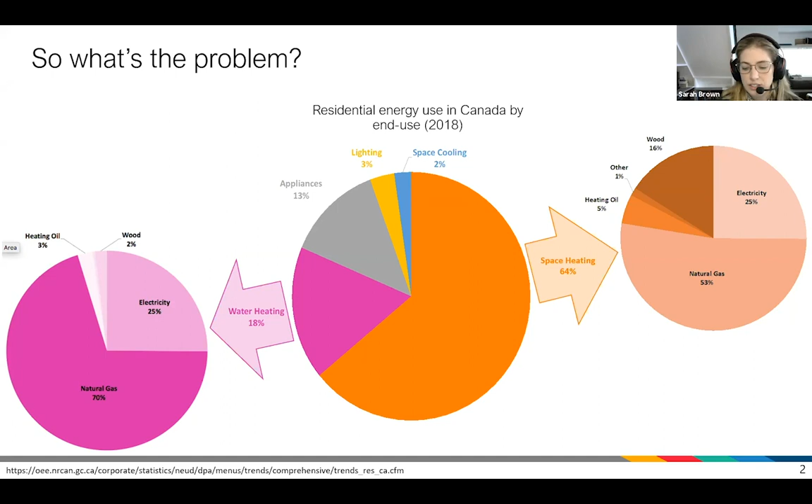Thankfully, in Canada, most of our electricity is actually generated from non-greenhouse gas emitting sources. So electricity is pretty clean in Canada. So when we're looking at appliances, lighting, space cooling, which are all electricity dominated end use categories, those ones are pretty good. So domestic hot water heating and space heating are just really good places for us to be targeting our efforts in reducing the residential sector's greenhouse gas emissions. If we also look a little bit further into this, 55% of the Canadian residential building stock is actually single detached homes.

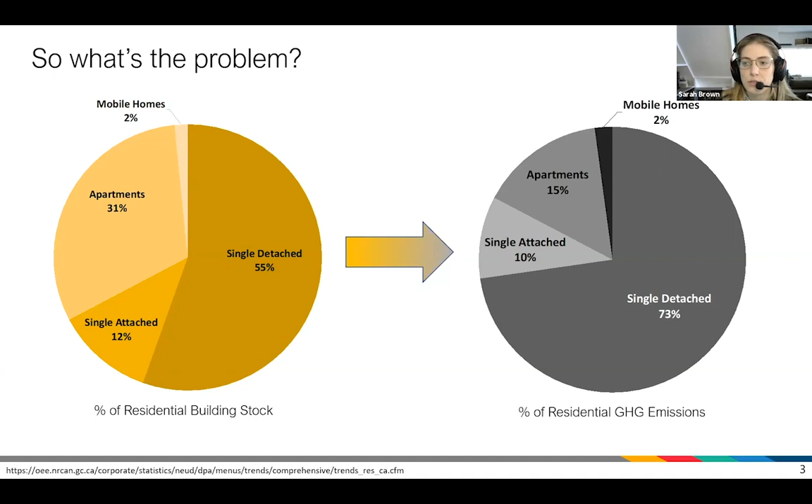So solar thermal collectors are really an interesting option for heating dominated climates since you can get higher efficiencies and directly collect the thermal energy and use it to supply heating demands in the house. So domestic hot water and space heating. So a really interesting option for Canada where we're heating dominated in our end uses. So Curtis Meister, who's one of my colleagues in the Sustainable Building Energy Systems Research Group, found in his research that solar thermal systems have the potential to meet over 90% of the space heating and domestic hot water heating demands in energy efficient single family detached homes in Canada. So really a lot of potential in this more unconventional collector option.

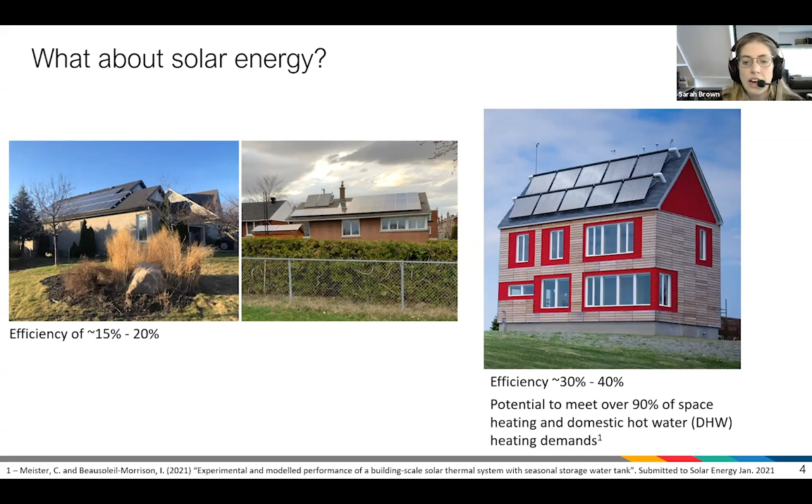So both technologies have their challenges, storage being a major one, cost is another often talked about challenge, but these are what we call active solar collection systems. And if they're designed properly, they can allow the same level of control for heating as conventional systems. But the title of this presentation specifically says that you will not need to put collectors on your roof to heat with solar energy. So, what's the deal with that? What's the solution? Passive solar energy is a third and I think often forgotten contender in solar energy.

I love this room. My plants love this room. My cats love it for sleeping. This is actually the room where I'll also often take my video calls since I get the best internet there. And I'll often close the door to keep my cats out because they'll harass me during my meetings. And by the end of an afternoon meeting, I'm often sweating because this room gets really hot.

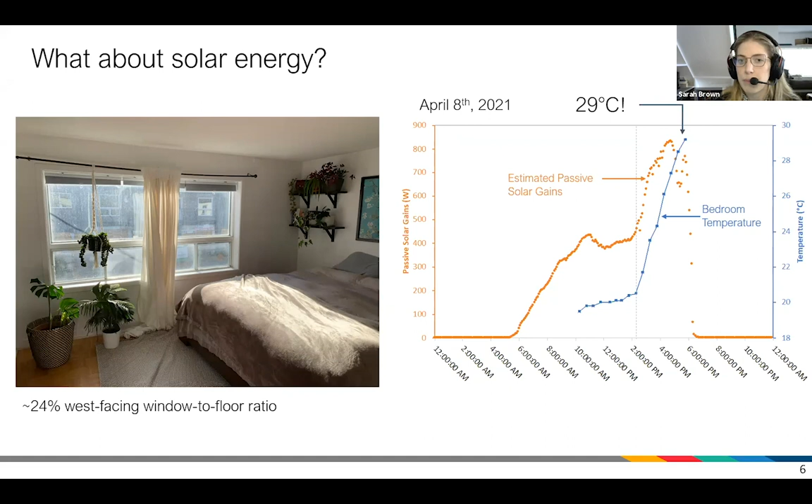I've put a vertical dotted line where the indoor air temperature really starts to spike in my room. Remember, this is a west-facing window, so I'll get most of my solar gains in the afternoon. Sun rises in the east, sets in the west. So you can see the spike in the indoor air temperature corresponds to the same time as the passive solar gains start to increase in magnitude, which makes sense. We're getting more energy into the space by passive solar gains, so the temperature really starts to peak up.

To put the heating potential of this passive solar into perspective, a high performing personal space heater, which some of you might have been using working from home this past winter, puts out between 375 to 750 watts. So the passive solar gains into my room on this day were comparable to turning on this little space heater at 10 o'clock in the morning, closing the door and leaving it on until 6 p.m. And we even got more than 750 watts between 3:30 and 6 o'clock, so even more than just the space heater.

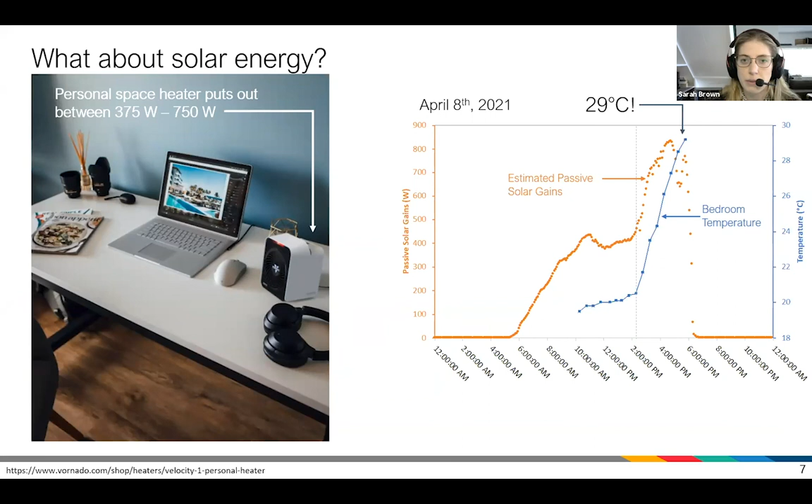All right, so pretty split answers here. And I was wondering if some of you would maybe not pick the obvious one, just assuming that it wouldn't be the obvious answer. So if you didn't pick the obvious answer, then you were correct. We actually get, on average, more than 3 times more passive solar on a sunny day in February than we do on a sunny day in July. So again, the total solar irradiance that we're getting is higher in the summer, but the passive solar energy that we get into our houses is higher in the winter.

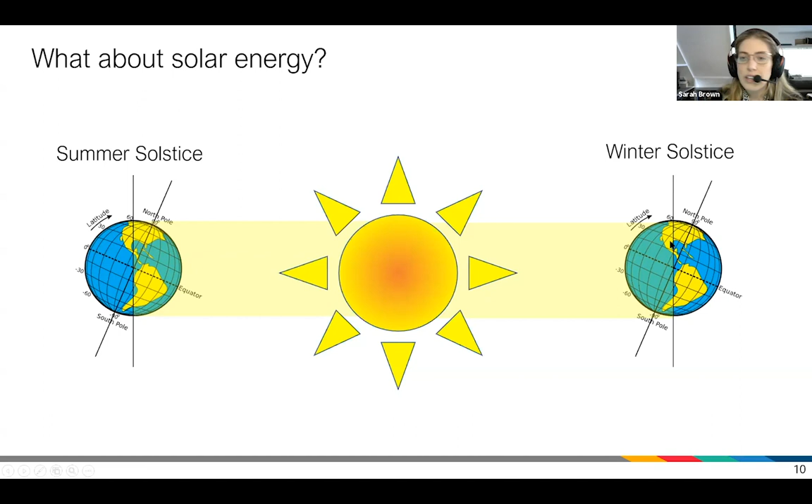But basically this correlation between our peak passive solar and our peak heating demands has a lot to do with the Earth being tilted at an angle of 23.5 degrees from its orbital plane, which I've shown in the schematic here. So we're not perfectly straight on with the sun. We're actually angled a little bit. And this tilt is why our days are longer in the summer in the northern hemisphere and shorter in the winter. So you can see on this left-hand globe, which I've represented as a summer solstice, the northern hemisphere is in the irradiated area longer. And in the winter time, we're in the irradiated area shorter, which means we have shorter days in the winter and longer days in the summer.

And Ottawa sits at a latitude of about 45 degrees north. So if you look at this schematic, you can get an appreciation for how the angle at which the sun irradiates our homes changes between the winter and the summer. The reason we get our maximum passive solar in the winter and minimum in the summer is due to our latitude in the northern hemisphere and the low solar altitude that we get here in the winter. So the low solar altitude in the winter, or the sun looking lower in the sky around noon in the winter versus the summer, results in the beam component of the solar irradiance being in line with our windows. Whereas in the summer, the sun is higher and the beam component hits our roofs a lot more.

So over the next year, I encourage you to keep an eye on the sun patch that's made by any south-facing windows in your home. You'll notice in the summer that the sun patch is pretty small and sits close to the window, but in the winter, it'll actually extend much further into your room. So you'll end up with a much bigger sun patch. And this is due to the lower solar angle that we have in the wintertime.

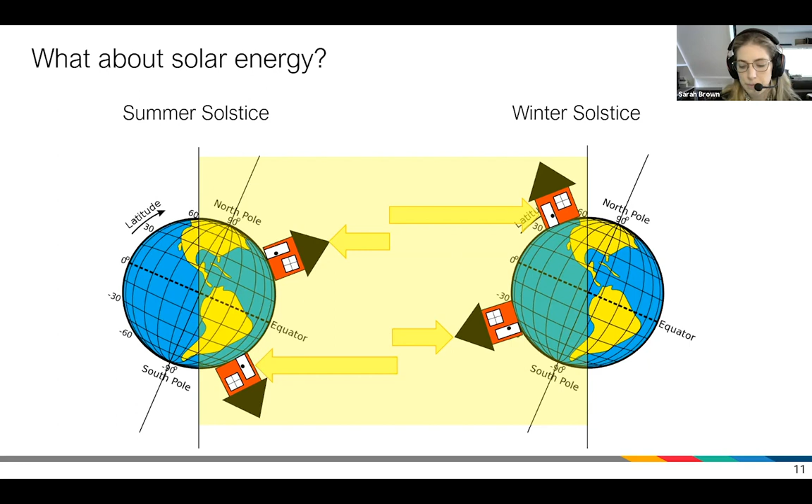All right, so now let's start to talk about my research in a little bit more detail. So we've now established that passive solar heating has potential and is a good heating option for Southern Canada. So let's talk about my research specifically. So I don't actually do my research in my bedroom, taking measurement data with a little thermometer.

That was just for fun.

I do all my research at the Urbandale Center for Home Energy Research, which we also call the Cheer House, and I'll be referring to it as that for the rest of the presentation. So the Cheer House is a research facility that you may have seen as you passed by Carleton's campus and thought very curiously, what is this little red solar house on a hill?

So let's just run quickly through some of Cheer's construction features. So it's built as an average size single family detached home that's typical of Canada. So about 6 by 12 meter footprint, full height unconditioned basement and 2 above ground conditioned floors. The house is of wood frame construction, built with more insulation than what's required by current building code, but built using common construction practices. So again, you could give our specs to any contractor and they should be able to build it.

The house is also very airtight. So we've purposely designed it to be airtight to minimize any energy losses through air infiltration. And the windows are triple pane argon filled windows with low emissivity coatings. So these windows are basically designed to allow as much passive solar heating as possible into the house while minimizing energy losses through the windows.

To maximize the potential for passive solar heating, Cheer has most of its windows on the south facade. So we have about 20 square meters of south-facing windows on the south side, and we have minimal window area on the east and west facade. So about 2.5 meters squared only on the east and west. And we have no windows on the north facade.

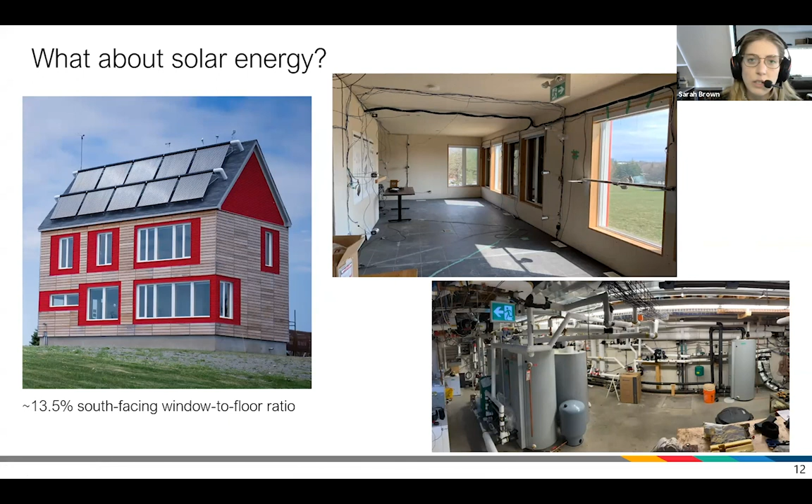In the basement, you can see basically a lot of piping and mechanical equipment, and a lot of this was actually installed by graduate students. There are many different thesis projects installed at the Cheer House, and we have a vast hydronic system that lets us switch between these projects really quickly.

So another really prominent feature of the Cheer House is the radiant floor. So we have 110 meters squared of low mass radiant floor installed on the 2 above ground stories of Cheer. So the 2 kind of living areas of Cheer. We have purposely designed these floors to be low mass and to have the pipes close to the surface so we can minimize the thermal lag between when we turn the floors on and when they start having an impact on the air temperature.

So for air-based HVAC systems, which I imagine most of you are familiar with if you have a home in Canada, when you need heat, your furnace basically turns on and starts delivering hot air to the house. And this has a pretty immediate impact on the air temperature of your house. In comparison, the thermal response of radiant floor heating and cooling systems is delayed from its on time.

So the heat from the water that's running through the pipes needs to then heat up the floor construction around it, which then allows you to heat up the surface of the floor. And then that surface will start convecting heat into the room and also radiate energy to the other surfaces to heat them up so that they can start convecting heat into the room as well. So again, there's a bit of a time delay between when you start sending hot water to the floors and when you actually start having an impact on the indoor air temperature.

So some radiant floors are designed to have high thermal mass, but we have purposely designed our radiant floor to be low thermal mass so that we can minimize the time lag between turning on the floors and having an impact on the air temperature.

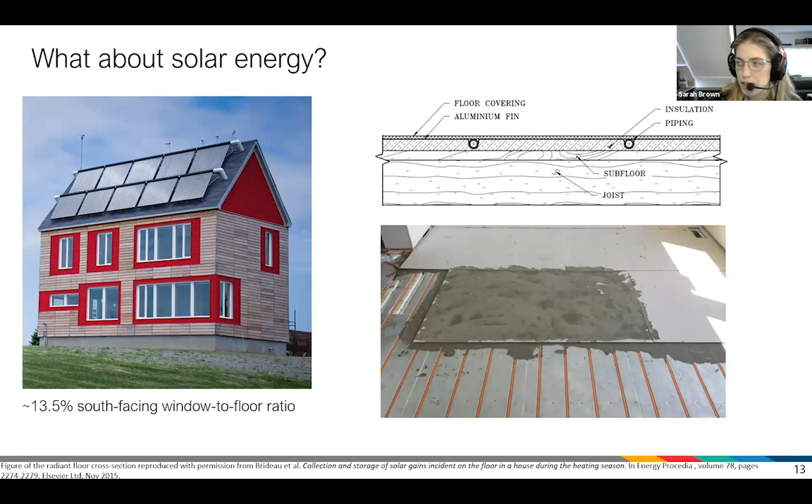So on this day we were mechanically heating the CHEER house at night, but no cooling was offered during the day. Something to notice here is that we're dealing with a lower window to floor area ratio. I forgot to mention this when I was presenting on my bedroom, but my bedroom had about a 24% west facing window to floor ratio. So now we're dealing with a 13.5% window to floor area ratio, but we're dealing with south facing windows now, which should receive more passive solar. We're also dealing with mainly south-facing windows and also a better constructed house than mine.

So my poll for you is if CHEER started at 22 degrees at about 8 o'clock in the morning, what is the maximum temperature that you think we reached on this January 28th day? So again, it's minus 20 out, so keep in mind that it's a lot colder. And yeah, we're just gonna give you a few seconds to get into that poll and submit your answers.

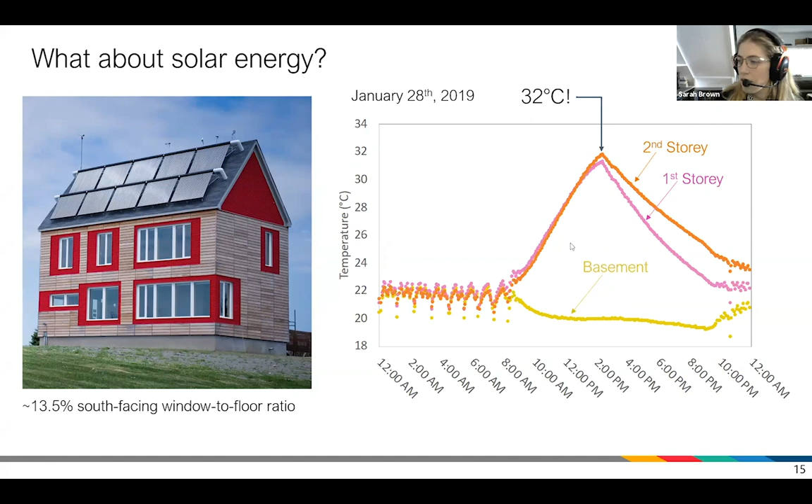All right, so here's a schematic of what we call the PISCES system. This is the system that we've designed to help us capture the passive solar energy without having overheating. PISCES essentially stands for the Passive Solar Collection Energy System. And I give credit to my professor who's always able to come up with really nice acronyms for very wordy names for systems. The system makes use of hot and cold thermal storages. In this case, we use water storage, the radiant floors that are installed at CHEER, and a water-to-water heat pump.

So the way it works is that when we need cooling in the house, we can send cold water to the radiant floors. This cold water removes excess energy from the conditioned spaces, thereby preventing overheating. So cold water leaves this cold storage tank, goes through the radiant floors, and it heats up as it extracts energy from the conditioned space. This warmed water is then returned to the cold storage, and this process continues as long as you need cooling.

But something to think about is that if we didn't do anything to this cold tank, and just continued sending water to the floors, heating up that water, and bringing it back, eventually the cold storage tank would just heat up and we wouldn't be able to cool anymore because the tank would be at too hot a temperature. So we use a water-to-water heat pump to basically move energy from the cold storage tank over to the hot storage tanks.

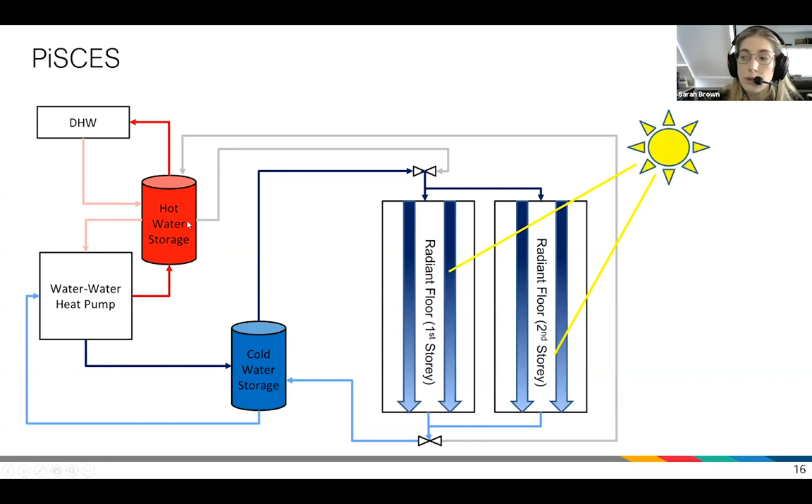So this keeps the water in the cold storage tank cold and lets us store collected energy in other tanks where we can make use of it. We can make use of the collected energy for things like domestic hot water during the day, or even space heating at night.

And we're not even restricted just to nighttime space heating demands. If the sunny days in the winter are followed by cloudy days where there isn't enough passive solar heating during the day, we can use the stored thermal energy where we had too much of it on a sunny day and resupply it to the spaces via the radiant floors.

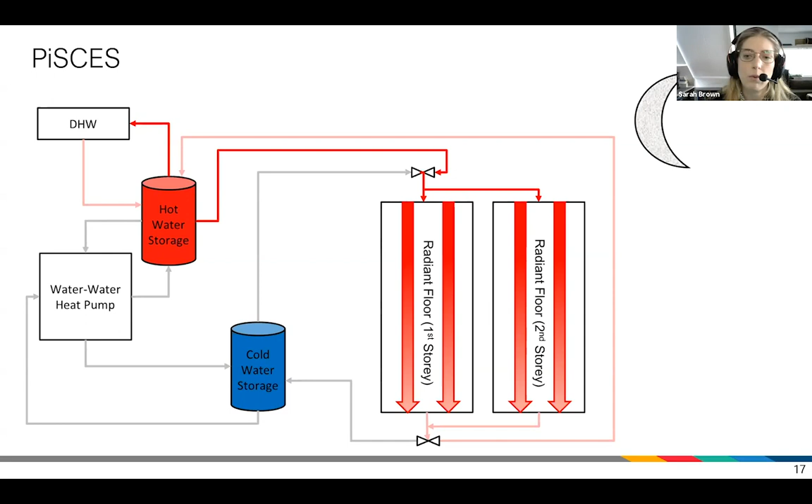So the Pisces system essentially lets us collect passive solar energy when it's not needed or there's too much of it, store it, and then resupply it for domestic hot water heating and for space heating when sufficient passive solar gains aren't available. So I'm going to spend the rest of this presentation talking about some of the results that I got from experiments that I ran in February 2019.

So in February 2019, the Pisces system was supplying both the space heating and cooling demands for the CHEER house. This slide actually shows how I operated the radiant floor during this time. So the radiant floor heating turned on when either the first story or the second story dropped below 19.5 degrees Celsius, and stayed on until both of the floors were above 20.5 degrees Celsius. So basically a 1 degree temperature band.

And similar thing on the radiant floor cooling side. The radiant floor cooling turned on when either of the first or second stories got above 23.5 degrees Celsius. And it stayed on until both of the floors had cooled below 22.5 degrees Celsius. So again, about a 1 degree temperature dead band that we're working with there.

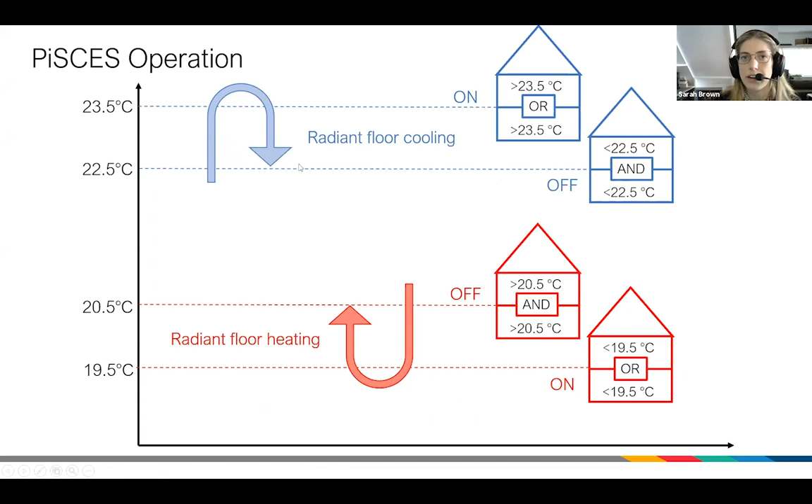And to give you all an idea of how we supply space heating and domestic hot water heating demands, we basically have three 450 liter hot water tanks, as well as a seasonal storage system that we use to store passive solar energy that's collected by the Pisces system.

So in 2019, we were running some short-term tests on the Pisces system. So the seasonal storage system was not at a hot enough temperature to be able to supply heating demands. So we were really limited to the energy that we could store in the 3 hot water tanks for supplying space heating and domestic hot water heating. 2 of the tanks we reserved for space heating demands, and the 3rd tank is reserved exclusively for domestic hot water heating demands, which I've shown here.

And we would basically exclusively use stored thermal energy to supply space heating and domestic hot water heating until the tanks drop below the radiant floor supply temperature of 30 degrees Celsius. So once the tanks are below 30 degrees, which is what we want to send to the floor, we would turn an inline electric boiler on to help add some energy to boost the temperatures up to 30 degrees Celsius to meet space heating demands.

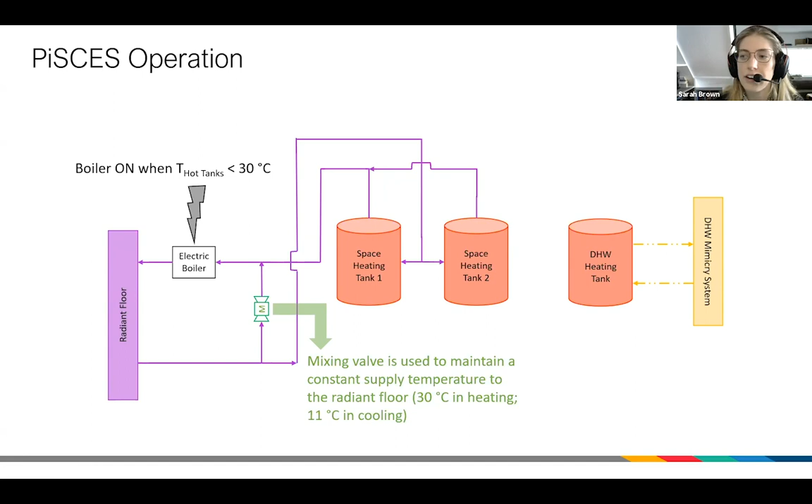So anytime that we're supplying space heating demands with this boiler running, we're not using entirely stored thermal energy. We're also using some electric energy. So this is kind of what we would call our unmet demands.

So I have another poll for you guys. Do you think that we were able to keep the CHEER house below its 23.5 degree cooling set point with the Pisces system running? So again, remember without any cooling in the CHEER house on January 28th, that cold day in January, we were able to get the house up to 32 degrees. So now we have this radiant floor cooling system running. Do you think we were able to keep the house temperature below 23.5 on this day? And I think we're going to have a poll come up.

There we go. Perfect. So throw in your answers and we'll see who gets it right. I don't have any prizes, but you can give yourself a pat on the back if you get it right.

All right, we have our results. Yes, I love all the enthusiasm. I love all of your belief in my Pisces system. Unfortunately, though, we were not able to keep it below the 23.5 degrees Celsius set point. So we weren't able to keep it below the set point, but the house did actually heat up to almost 26 degrees Celsius, even with the radiant floor cooling running.

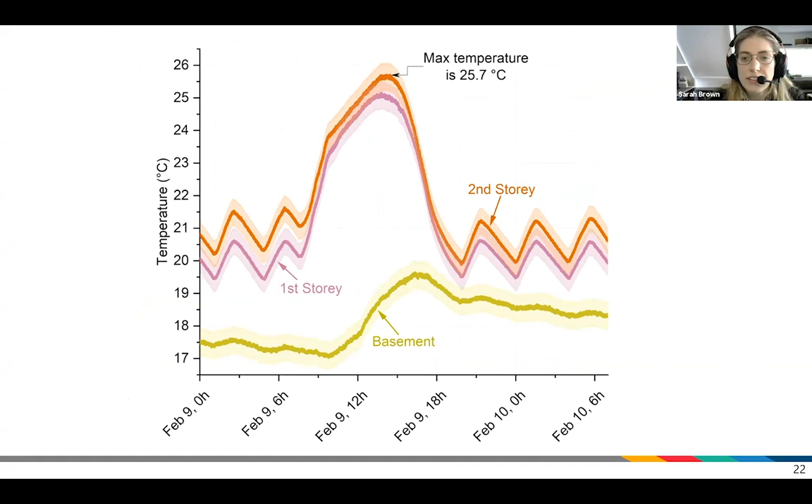So we're going to look at why this happened by looking at the major heat transfer paths into CHEER on this day. So let's imagine the conditioned zones in CHEER as boxes. When the Pisces system is operating, the main heat transfer paths that we have are the passive solar gains that are coming in through the windows. So these are adding energy to the space. And then we have the radiant floor heating and cooling, the heat addition and the heat extraction.

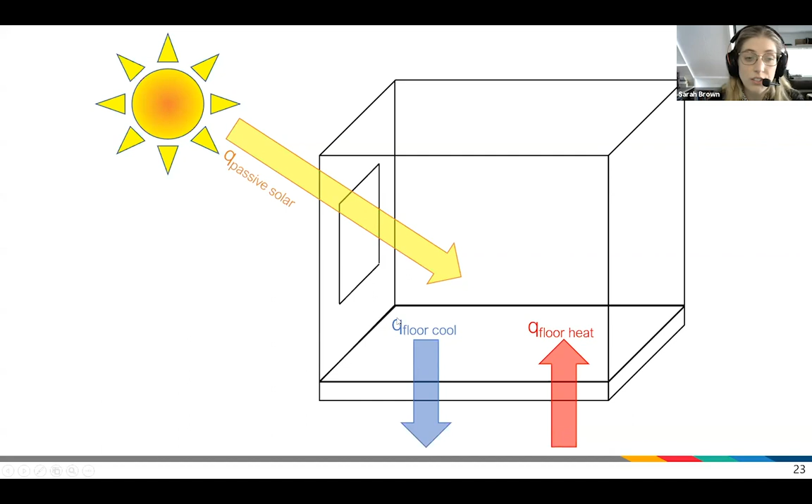So these aren't all of the heat transfer paths. Obviously, the building is still going to be losing energy through its building envelope, but these are the main ones that we can measure at the CHEER house. In engineering, we use Q to represent heat transfers. So we have the heat added by the passive solar gain here, the heat added by the radiant floor, and then also the heat that's removed by the radiant floor cooling system.

I don't know if any of my thermo students are in the audience here, but we're going to do basically an energy balance on these rooms. So obviously the radiant floor heating and cooling can't be on at the same time. They use the same piping network. So when one is operating, the other has a value of 0.

So if we sum up the energy that's added by the passive solar gains, and then the energy that's either added or removed by the radiant floor at every measurement time, we can see if we have a net energy addition or a net energy removal from the conditioned spaces.

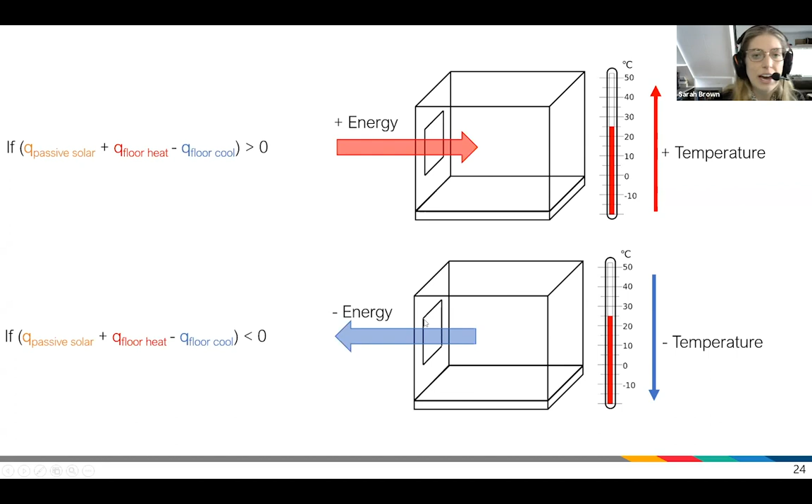So again, if we sum up this Q passive solar, so the energy added to the space by solar gains, the energy added to the space by the floor heating, or the energy removed by floor cooling, if the sum of those three things is greater than 0, then we have a net energy addition to the space. And if you're adding energy to your house, then your temperature is going to be increasing. If the sum of these three things is less than 0, well, then we have a net energy out of our system, which is going to result in a decrease in temperature.

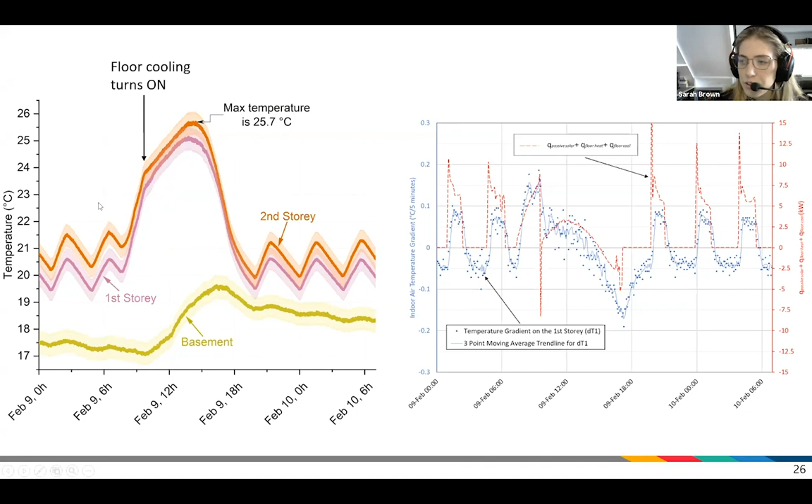I'm just going to check on my time here really quick. Okay, it looks like we're running out of time pretty quickly. So I had another day that I wanted to show you guys, but maybe I'll just kind of go through it really quickly.

So for the last poll of the presentation, I'm going to ask you guys, do you think we were able to keep the indoor air temperature below the 23.5 degree set point on this day? So last and final poll to see if you're the almighty knower of the Pisces system. All right, yes, thank you everybody for having confidence in this. So most of you said yes, and you're pretty much right.

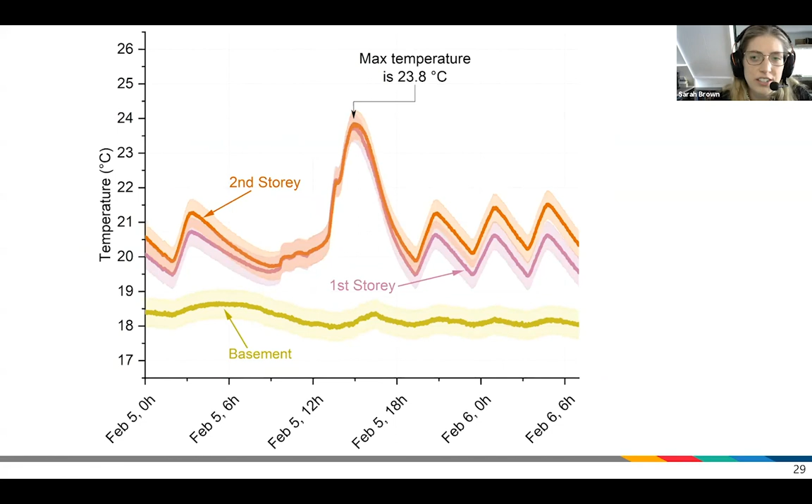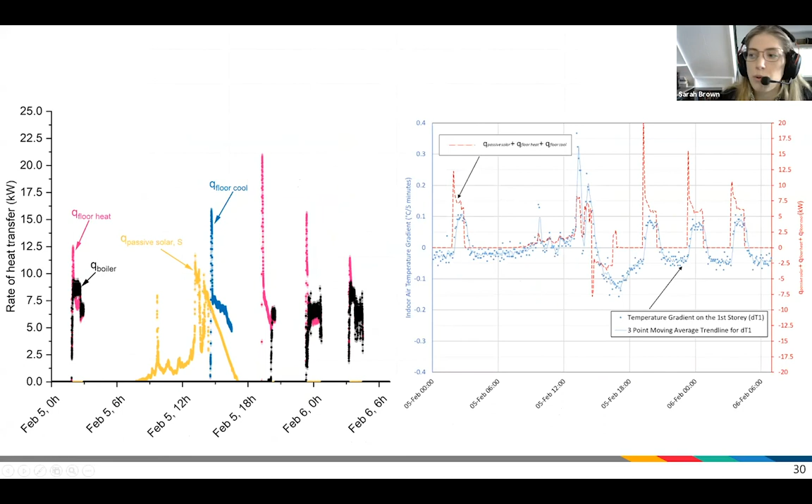I mean, we got up to 23.8, slightly above our set point, but I attribute a lot of this to the thermal lag between when we turn the system on at the set point and when it starts to have an impact on the indoor air temperature. So I'm just going to quickly show this graph, which is the heat transfer graph. And the most important thing to see is that when we turned the radiant floor cooling on in the afternoon, the solar gains were already on a decline at that point. So by the time we turned on the radiant floor cooling, its extraction rate was higher than the rate at which we were receiving energy through passive solar gains.

So again, if we look at that sum over here, the red line on the right, we had passive solar gains in the morning, so the red line's positive, and then as soon as we turn the radiant floor cooling on, that red line drops down to a negative value, showing that we're having a net energy extraction from the building, and we have a corresponding decrease in temperature. So these blue lines drop down to negative. So we're basically able to have a near immediate impact on the indoor air temperature, keeping the house much closer to its set point.

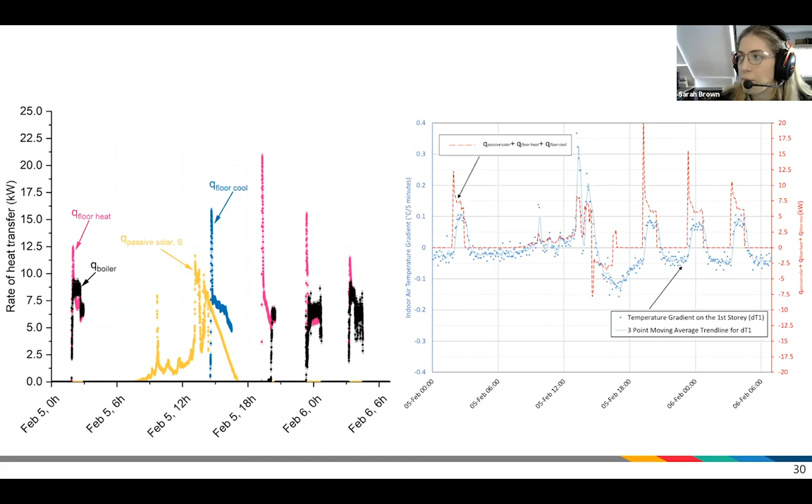But because we ran the radiant floor cooling for a shorter period of time on this day than we did on the last day, we were only able to supply a portion of the first heating demand with entirely stored thermal energy. So again, still relying pretty heavily on the boiler here, but we were able to supply all of the daytime space heating with passive solar gains and then a portion of the active space heating at night. And this is just again showing that we were able to keep it pretty close to the set point, just slightly surpassing. And again, I'm attributing that to the thermal lag of the radiant floor.

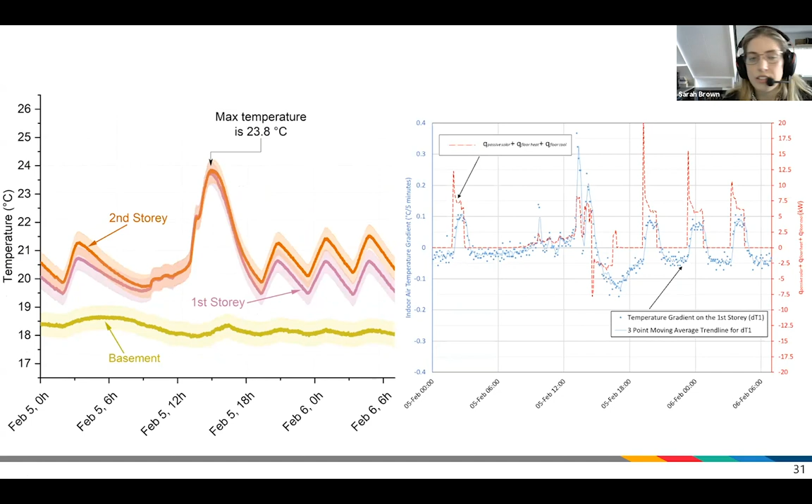So again, main conclusions, what do we take away from this talk? Passive solar heating has a huge potential in southern Canada, so much so that overheating to 32 degrees Celsius is a risk, even in the winter. We can significantly decrease the maximum temperature in the CHEER house by running the Pisces system without needing to restrict the passive solar gains or vent this energy from the house. We aren't always able to keep the house below set point, but I'm working now on optimizing the system operation to better address this.

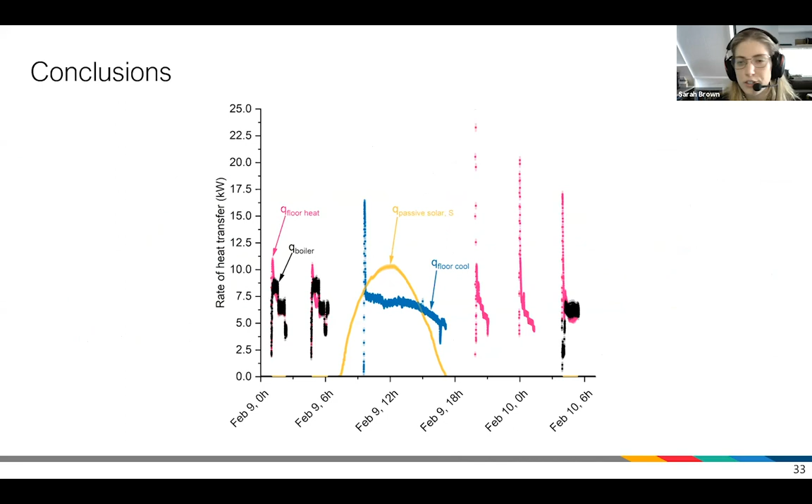And the other conclusion is that we're able to collect excess passive solar energy, store it, and then use it for heating demands in the future, so like these space heating demands that we saw on the sunny day. There's lots of work to be done on this system in the coming years of my PhD, but the preliminary results are looking really promising, and we're really excited to be investigating the system more in the future.

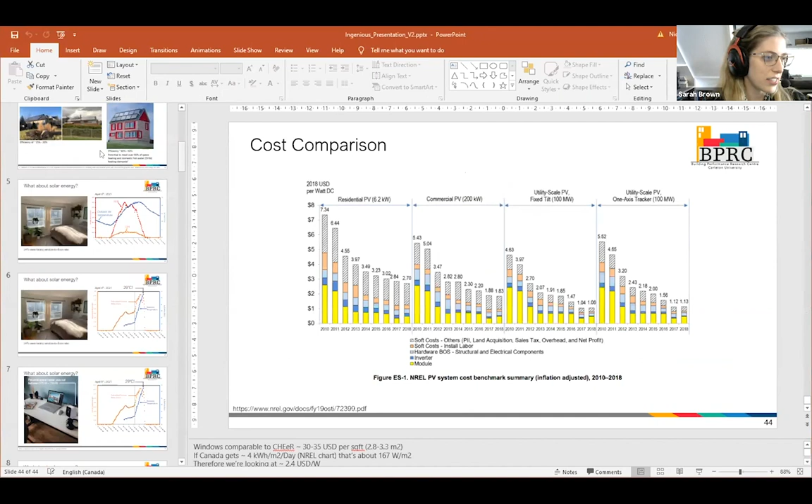So I think it's really just the more area you have, the more you can make use of this technology, and the more collectors you can put, so the more energy you're going to harness. So yeah, I really think too small a roof area isn't necessarily the issue. If you can put even one panel, you're going to be able to collect some energy with that.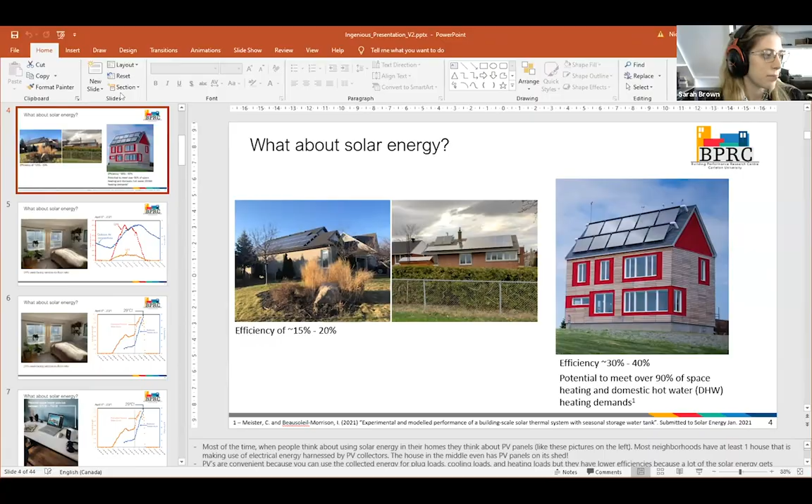All right, next question. Has there been any consideration of incorporating the ventilation system into the Pisces control system to help maintain comfort while still collecting passive solar? Yeah, so I'm assuming here that you're talking about incorporating air exchange and dehumidification potentially, and those are definitely things that need to be considered with the Pisces system. So with radiant floor cooling, we're obviously only having sensible cooling and not any latent cooling. So there is the potential for humidity buildups during humid times, and condensation on the floor is actually a really common problem that people have with radiant floor cooling.

So we would definitely be, implementing this in somebody's home or in future iterations, looking at incorporating a separate dehumidification system. And we actually do run an ERV separately from the Pisces system. So these things are still incorporated into the house, but they run completely separately from the Pisces system. So my research is focused pretty exclusively on controlling the radiant floor heating and cooling, potentially looking into dehumidification later in my PhD. But yeah, otherwise the ventilation runs separate from the radiant system.

Right, next up, do you consider Pisces to be more suitable for new builds or existing homes? Yeah, so that's another big question. So again, if you think about the components that make up the Pisces system, it's a radiant floor, the heat pump, and then thermal storage. And then, I mean, window area, obviously.